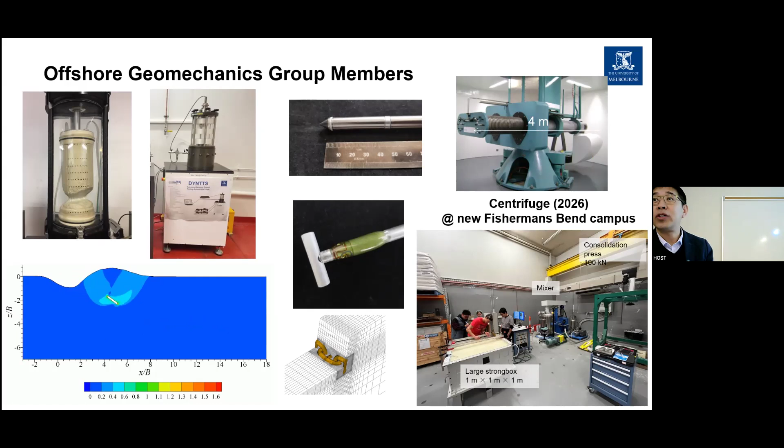In addition, we're developing a large deformation numerical modeling technique. In the coming years - not next year, maybe another 3 or 4 years later - we're going to build a new centrifuge on the new campus in Melbourne.

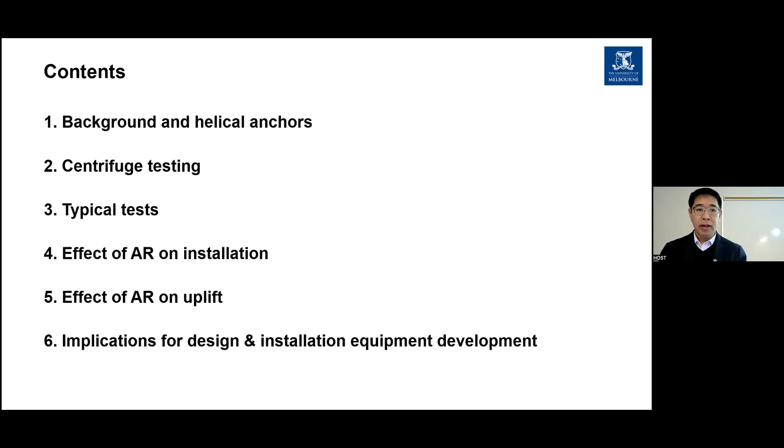Today I'm going to talk about helical anchor. This topic is close to Professor Deng's work. We're going to give a background introduction and also show you some centrifuge testing we have done - we've done a series of tests, but today just a small portion. I'm going to show you several typical tests and talk about the effect of AR on the installation and on the holding capacity. The last bit is the implication for design and for installation development.

The background: the offshore wind industry is booming, especially in Europe and China now. China is pretty much the biggest market now. So far the total installed offshore wind capacity reached 83.2 gigawatts by last year, and is estimated to be 380 gigawatts by 2030. So it's another big market to develop.

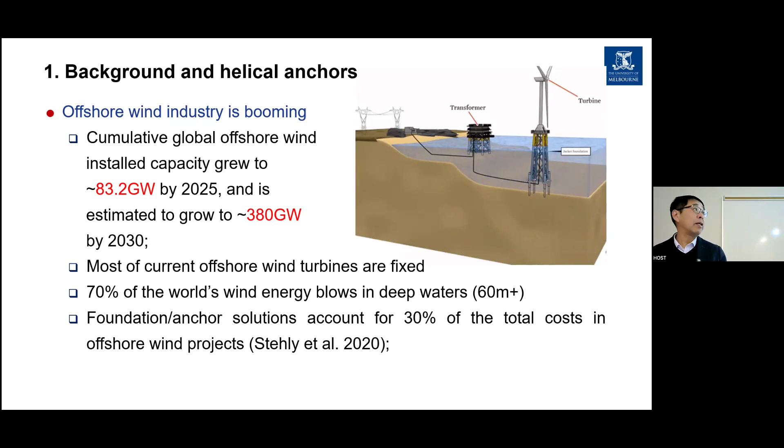Most offshore foundations are fixed foundations - 90% of turbines at this moment are fixed in the seabed, within shallow waters less than 40 meters-ish. However, 70% of offshore wind energy is in deeper water, deeper than 60 meters. So in order to go to deeper water, we need more economic and technically viable solutions, because the foundation costs 30% of the total cost - a big portion. That's why we're developing new foundations.

So the helical anchor came to our vision. We're thinking we're going to use this foundation for offshore wind. So what is a helical pile? Helical pile - and the name - you have a shaft, you have one helix or multiple helix.

This foundation is installed by giving a vertical force we call crowd force - compression - and also we give a torque. So basically you screw into the soil, right? It's sometimes called screw anchor, screw pile.

You have large axial capacity because you have a plate here, helix here, right? And the helix here, this distance we call pitch. That's a distance, right? The opening.

The reason we want to use this foundation is because it is quite easy installation. You just twist in, right? Twist in. For monopile, other foundation offshore, we use a huge hammer. We drop the pile down into the seabed. You make a big noise. That is the damage to the ocean mammals. In some areas, it is banned. You can't use it anymore. And also, we need heavy vessels, very expensive hammer to do that. But this one can be quicker, can be economic.

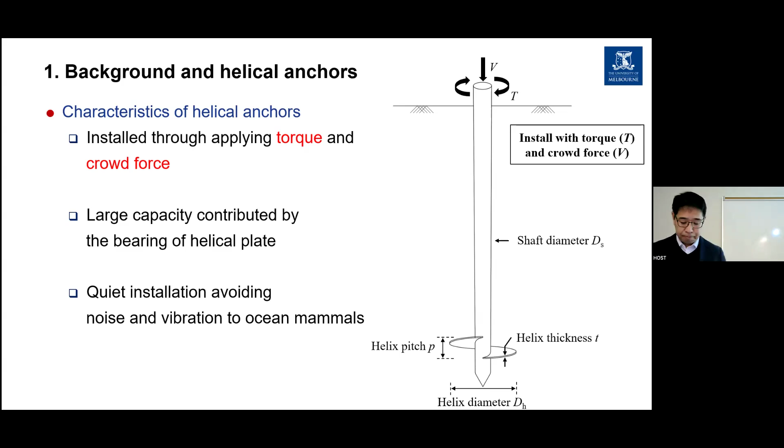This is the idea for helical pile. Helical pile is nothing new. It has been widely used onshore. Professor Deng is an expert on this perspective.

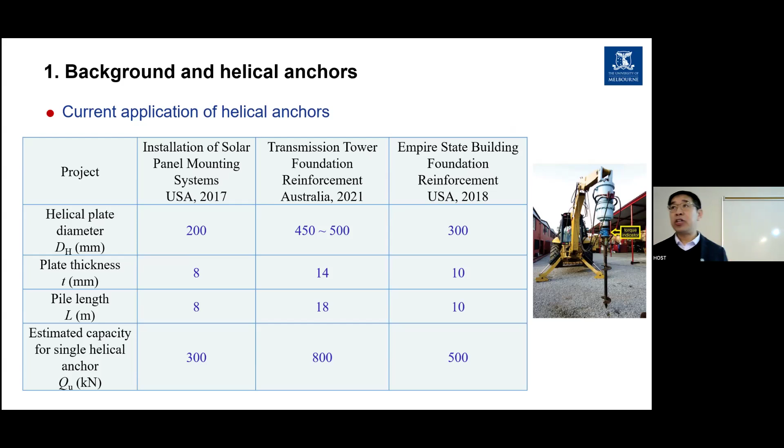So if you look at this table, the onshore helical anchor is relatively small. The diameter of your helical plate is up to 0.5 meter, right? That size. The pile length is 10-ish meters, and the capacity is 300 kilonewtons. But if you go offshore, you need to upscale the foundation much bigger, right? So the challenge is, what is the mechanism and how can we install these huge helical anchors for offshore wind? So this is our challenge.

So I'm going to introduce some of our work, my student's work on the helical anchor testing in centrifuge. We did a lot of tests, but today I'll just concentrate on what we call AR, advancement ratio.

It's defined as the penetration per revolution. You twist your anchor one revolution, one round, you have a distance, right? This distance is, let's say, divided by your pitch. The pitch is this distance. So AR equal to 1, this is traditional, we call perfect installation or pitch match installation.

People thought if your AR equal to 1, you twist one revolution, you have one pitch penetration, right? So in this case, your helix goes the same track. People think this has minimal disturbance to the soil. So this is the traditional thought.

So we did a series of tests. We look at the AR effect. If AR is greater than 1, you have more penetration. If AR is infinite, it becomes pure penetration like a pile without rotation. If AR is smaller than 1, you have a lot of twist. AR equal to 0 means pure rotation without penetration, right? So this is the idea.

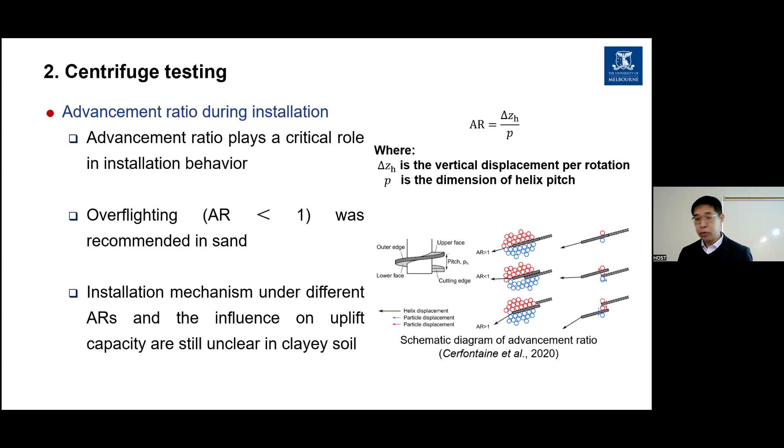And then we did a series of tests because some tests, especially from Dundee's group, they did a lot of tests in sand, and they recommend overflighting, AR smaller than 1. They believe AR smaller than 1, you need less crowd force, and you have a greater capacity. However, in clay, this may not be true. We did tests in clay.

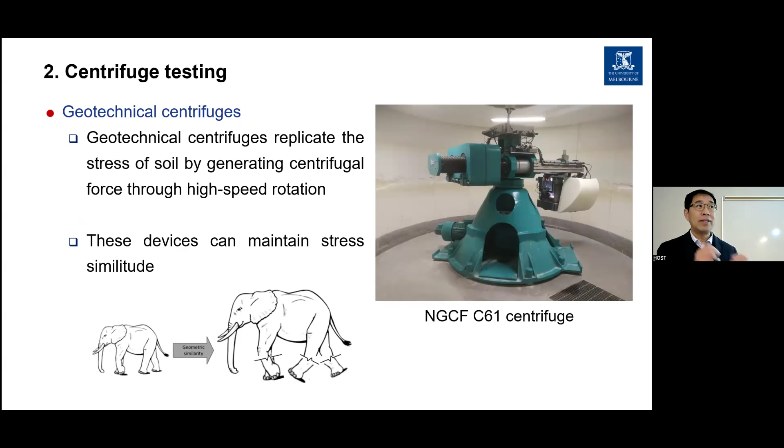And the idea of centrifuge, I think everybody has a geotech background, so I don't need to introduce too much. The idea is soil is a very special material on Earth, right? So you can only add your centrifugal force, so you can increase the stress level. Thus, you can use a small model to represent the bigger one.

So the soil is in a pasty slurry, and then we mixed it for a full day and vacuumed the air out, no air in the pasty slurry. We pour it in this strong box, and then we start to spin this box. When you spin the box it becomes like this, right? The centrifugal force. We spin this at 80 G, 80 times the Earth's gravity.

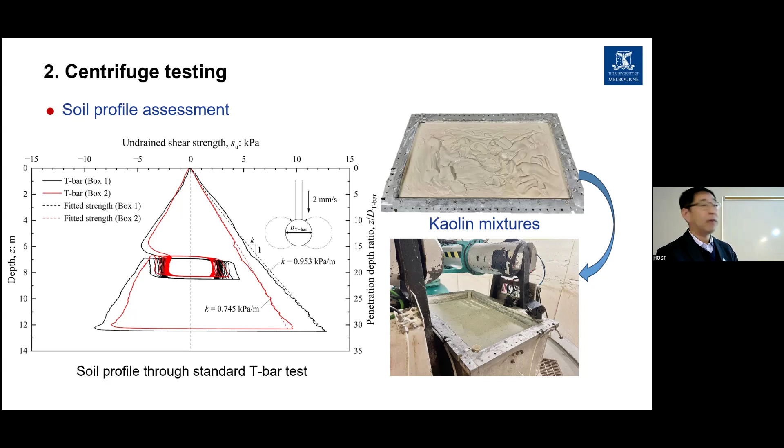In this test, we spin for more than 10 days for this slurry to become solid, to consolidate the soil sample. Eventually, with the T-bar, we penetrate into here. We look at undrained shear strength, the SU. You can see it increasing from the surface. This is normally consolidated clay, right? The increasing with depth. We penetrate, at some step we uplift the T-bar, and then we penetrate again in cycles. From here, we can tell the softening of the soil sample.

And this is the setup. This is the strong box. We have a 2D actuator, traditional 2D actuator, you can go vertical, you can go horizontal, go here. However, for this helical pile, we need another degree of freedom, which is rotation. So we built a rotation actuator, this one. We bound this to the 2D actuator, so we can control the 3-degree of freedom. You can twist and also penetrate.

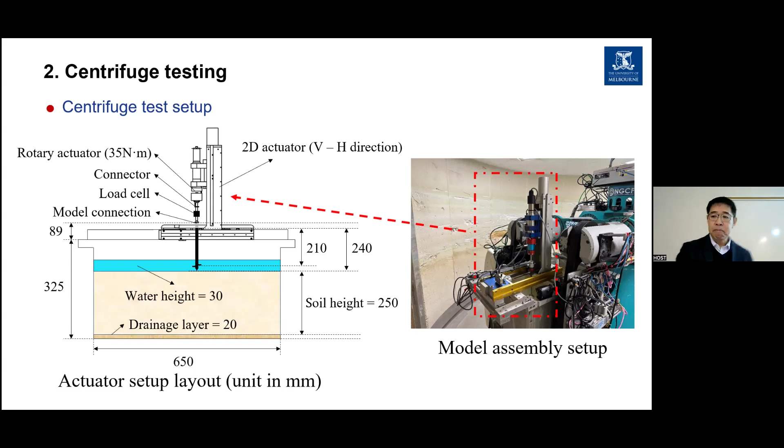So this is the setup. This is our rotation actuator. This is the load cell - you can measure the torque and the vertical force. This is the model, 80 times smaller than the real one.

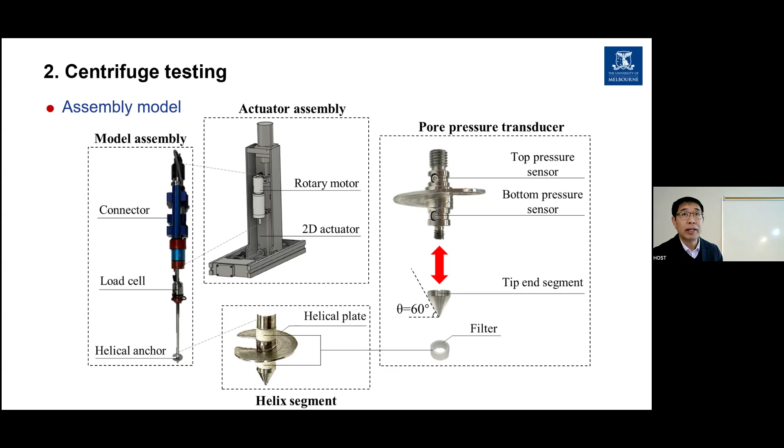You can see this is the helix. On top of the helix here, we put a pore pressure transducer, another one below the pore pressure transducer here, and here. We use a filter stone to cover this so you can protect it. You can measure the pore pressure during installation and uplift.

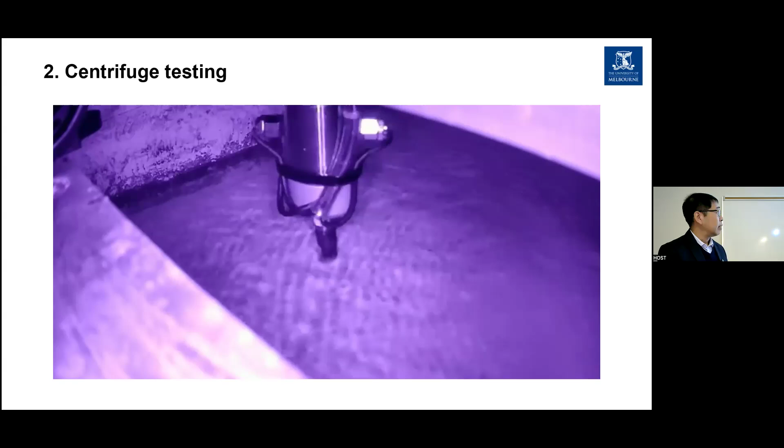So this is the test procedure. You can see this at 80 G spinning very fast. The camera sits in the box. You can see we twist into the soil at a specified AR, and then with this actuator, until we reach that point, we do the uplift.

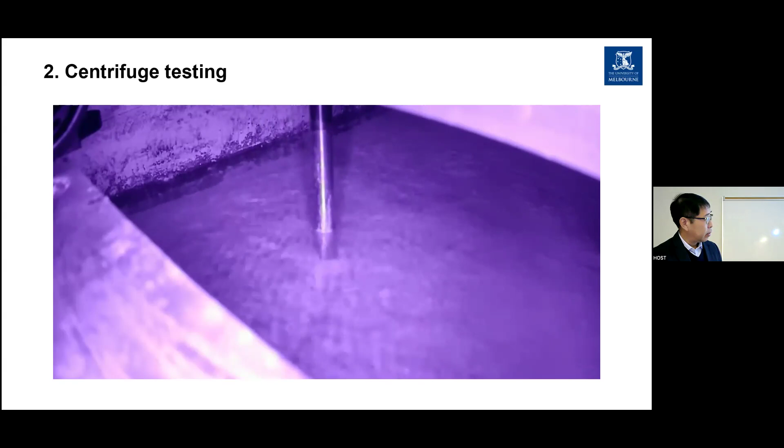During the uplift, it's locked, so no rotation anymore. You can see that when the anchor is out of the soil, there's some soil attached to the plate that comes out from the seabed surface. So this is a test procedure.

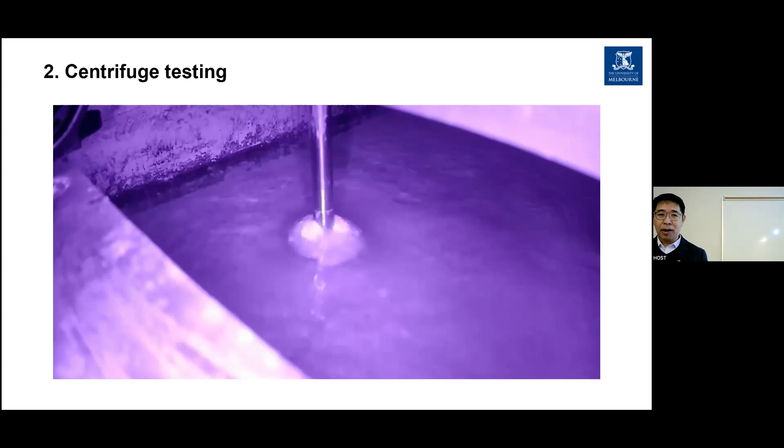We did both immediate uplift after installation, and the other one we hold, for prototype it's 10 years - in centrifuge, several days - hold that to allow the pore pressure to dissipate. We did both. Okay, I'm going to show you a typical test result.

We change the AR all the way around from 3, 1.5, 1, 0.9, 0.75, all the way to 0.1 - a whole range of AR. I'll show you one test, the AR equal to 1, the perfect installation. People thought perfect installation. Okay, so this figure is the crowd force.

The crowd force - we normalize, this is very much the background of Western Australian style. We like to normalize, make it a dimensionless factor. The crowd force divided by the projected area of your helix, divided by the soil strength, then becomes a dimensionless force or factor. This is the vertical penetration.

So from here, we start installation. At the beginning, zero, because the tip - we measure from here. The tip in the soil, the crowd force is very small, until the plate part of the soil starts to increase quickly, nearly linearly increasing the crowd force, until your specified 4.5 times your helix diameter.

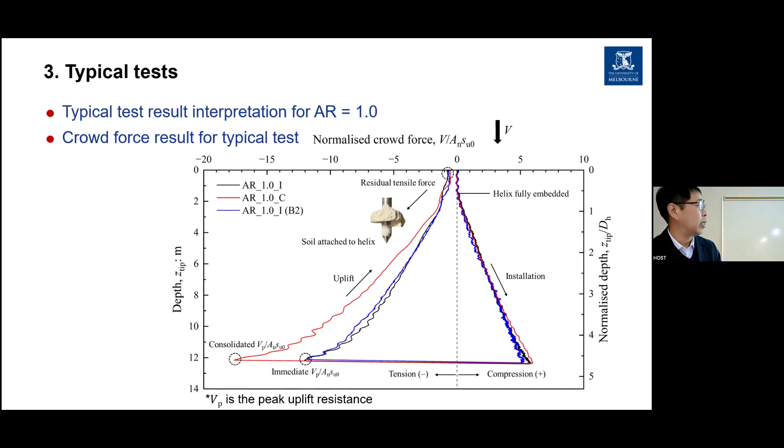And this is easy to understand. After consolidation, you have a much greater resistance, right? This point we call VP, which is your holding capacity of the foundation.

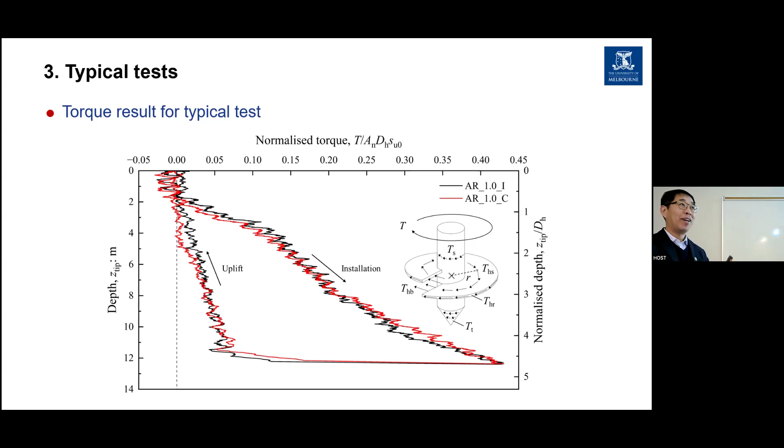When you do the uplift, we lock the rotation, so the torque didn't reduce to 0 - it has a residual value. The reason is when you lift up, the soil tries to push the helix, right? They try to unscrew it because you screw in, then lift up, so it tries to unscrew, which means you have to apply a force to lock that. That's the reason why it's not 0. So this is the torque.

Pore pressure - this is something very interesting, we didn't expect this. We have a top sensor and a bottom sensor for the pore pressure. When we talk about the pore pressure, actually it's excess pore pressure - meaning the total pore pressure minus your static pore pressure. Initially you have a static pore pressure increasing with depth, right, but here we only talk about excess pore pressure.

Installation, we look at the bottom pore pressure first - so the thick lines are the bottom one. This one, the black one, is the immediate uplift. The red one is the consolidated uplift. During installation, pore pressure increases, a positive value, which means as we install it, the soil here is in compression, right? So that is positive. When you do uplift, it becomes negative.

Negative pore pressure means suction - the soil is in tension, becomes suction. And the consolidated one has a greater suction. It's easy to understand: after consolidation, soil becomes stronger, thus you have a greater suction.

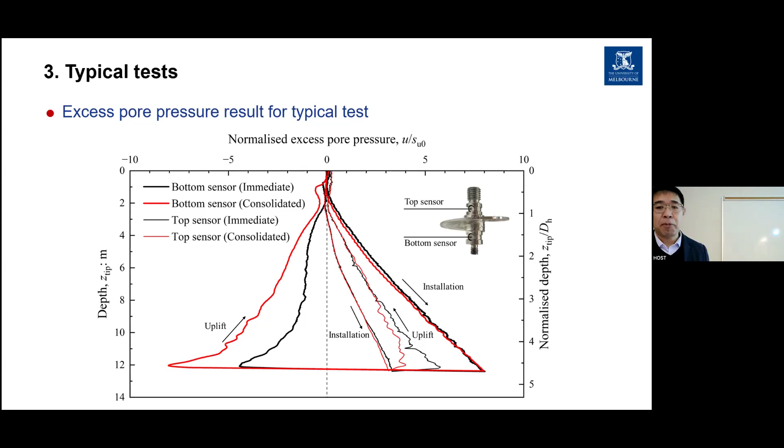The top sensor is interesting. At the beginning, when we install, we thought the top sensor would be negative because when you install it, you try to separate and you have suction. But actually it's not. Installation is still positive, which means the soil stays on the plate, it follows the plate and didn't show a trend to separate. When you do uplift, the soil squeezes onto the plate, so you have a greater positive pore pressure. That's a very interesting observation.

Okay, I'm going to show you the effect of AR on the crowd force. We did a whole bunch of AR tests, from 3, 1.5, 1, 0.9, 0.75, 0.5, reducing. You can see at high AR, which is penetration dominant installation, you need great crowd force, you need to press it. When the AR reduces, the crowd force reduces. When AR equals 0.9, further reducing to 0.75, the crowd force becomes a negative value, which means you don't need to press it anymore. You need to hold it in order to meet your specified AR.

We have this experience, right? When you install a screw with a screwdriver into the wall, at the beginning you press it, but at some stage you only give a torque and the screw goes into the wall. The reason is here: you don't need to press it anymore, the torque will drive it into the soil. With the AR further reduced, this tension comes back. The reason is at very small AR, with lateral rotation, the soil disturbs and softens.

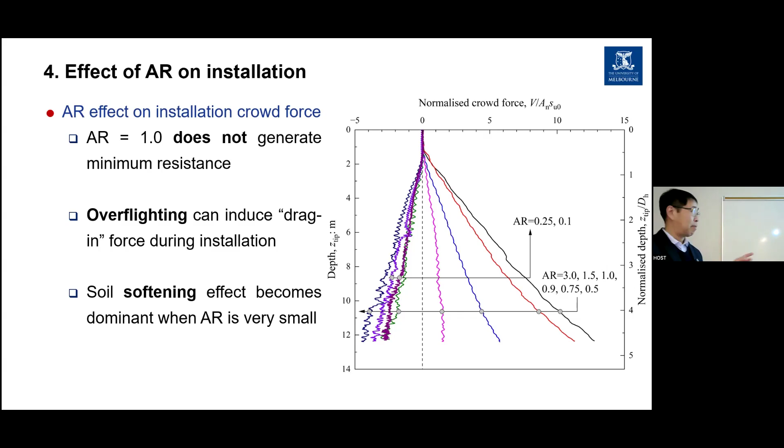This comes back, that's the reason. And if you look at the torque, at a high AR of 3, you don't need much torque because you have a very large crowd force. With AR reducing, you need to increase your torque - at 0.5 you need the largest torque. Then further reducing, Tmax reduces again due to softening. So this is interesting, there's no free lunch - you either do the work for penetration or you do the work for rotation. This gives some implication. I'll talk later about how to design your installation equipment.

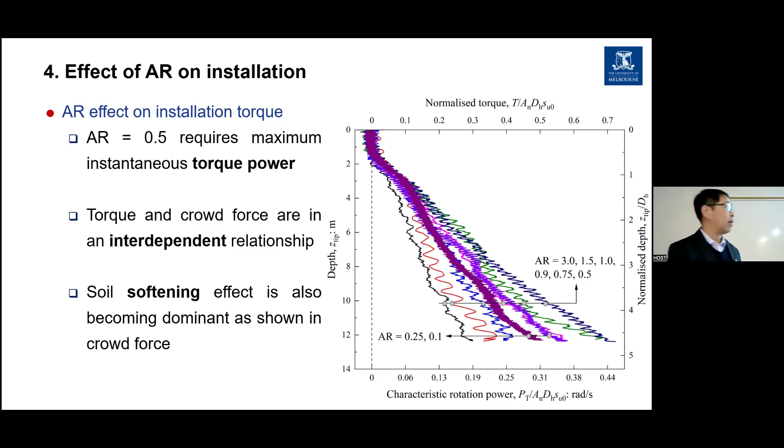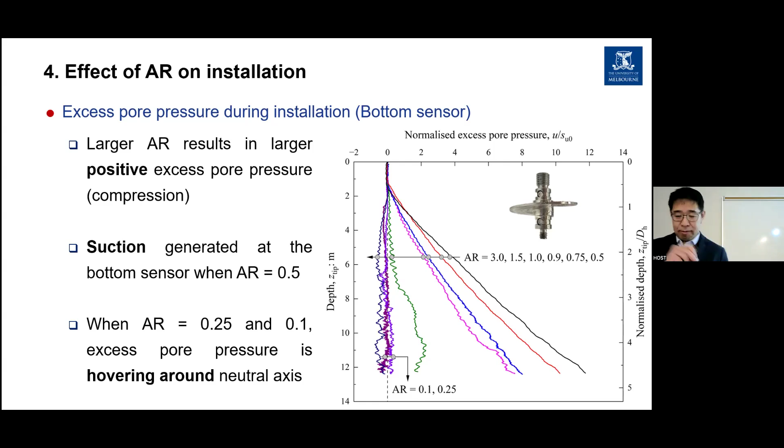Okay, let's look at the AR effect on the pore pressure. Again, this is the bottom sensor first. The bottom sensor pore pressure with AR reducing - at AR equal to 3, you have a great positive pore pressure because of more compression. With AR reducing, it becomes nearly zero or a little bit of suction, because small AR means you don't penetrate much, you stay there, and the soil tries to separate. That's why you generate some sort of suction or zero pore pressure.

The top sensor here, this is interesting. When we do the installation, at great AR you don't have much pore pressure. However, when AR reduces, you have an increasing pore pressure. The reason is when AR is small, you don't go much, and the soil has more tendency to press your sensor. We'll come back again because of the softening effect.

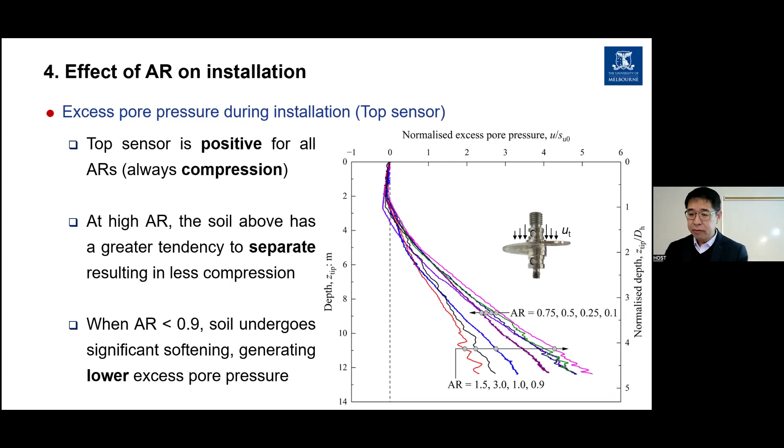Okay, so if we look at the capacity, after capacity - if you remember, we install and then uplift, this peak point we call the holding capacity. The VP is your peak resistance. We take this VP as your capacity, divide by the area and soil strength, and call this the capacity factor. Again, a dimensionless factor. We plot this one versus the AR.

You can see here, this is the immediate uplift. With AR increasing, this increases, peaking at 0.9. Further increase, it decreases again. This tells us 0.9 has the minimal disturbance. So people thought 1 would be minimal disturbance, but actually it's not, it's 0.9 in this case. The reason is if you have a perfect helix - meaning the helix has no thickness and is perfectly smooth - in that case 1 would be the perfect installation. But the actual helix is not, it always has roughness and thickness, so it causes disturbance to the soil. Thus, in this case, 0.9 is the optimal capacity.

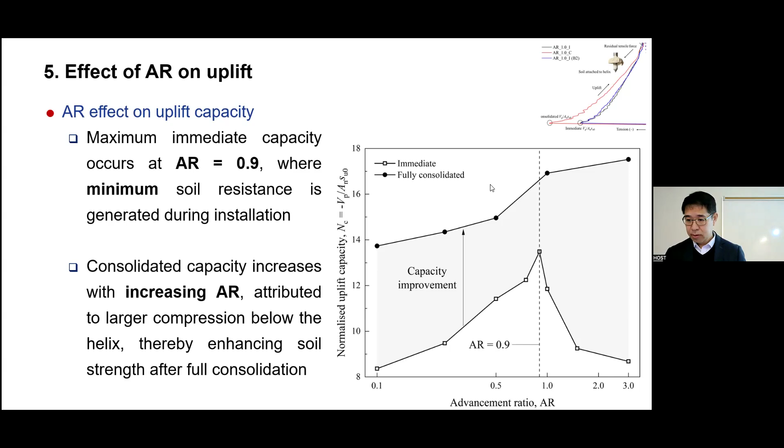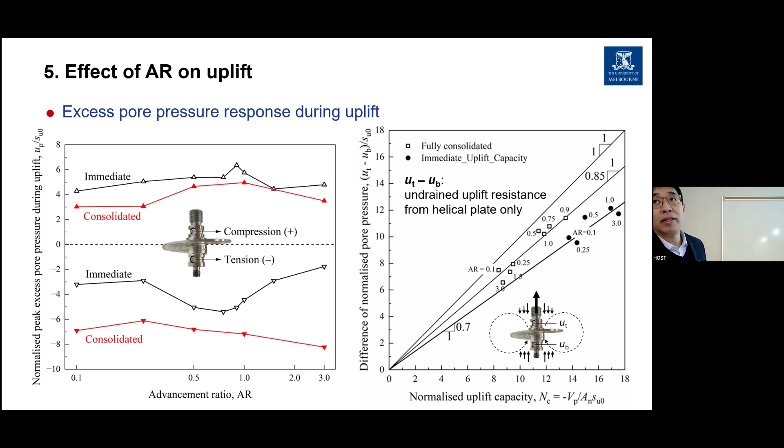For consolidated uplift, the plate contributed 70%, and the shaft contributed 30%.

And then we look into the torque factor we call KT or KT star. KT star is the empirical parameter people use to estimate your uplift capacity from your installation torque. Because we have the full data here, we can back calculate KT star by using the capacity divided by your torque.

So we have this line, the immediate uplift, the consolidated uplift, these are the factors. At small AR, the ratio, this is low, you need big torque, your capacity is small. But at greater AR, you don't need much torque, your capacity is great. So that's the reason, look at this.

We compare with other empirical parameters in the literature.

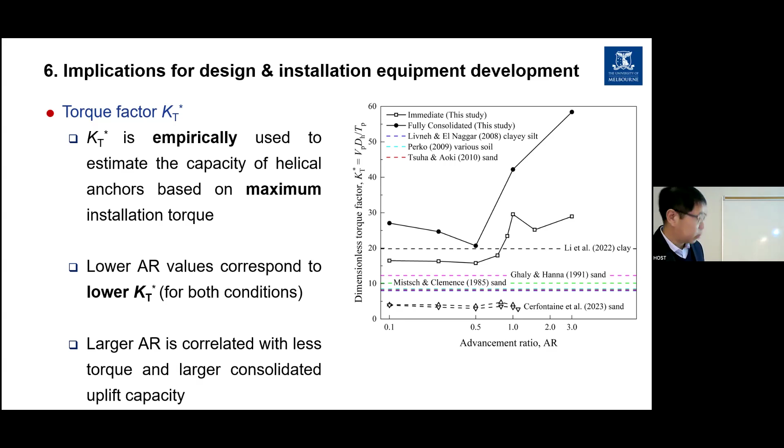I think I'll go to probably the last bit, which is on the installation equipment. This is the challenge for us, as Professor Deng also talked about. For onshore, you have an excavator or bobcat, you just make the hydraulic motor give a torque to install.

But for offshore, we need a much bigger plant or installation equipment. How do we do that? Especially with a barge on the ship, you have a great torque, how do you resist your ship movement? So we try to improve our confidence on this.

So we draw the installation into this figure, the crowd force, weight, and the torque. For great AR, you need a great crowd force but less torque. With the AR reducing, you need a great torque, you don't need much crowd force at all, or even tension.

So again, you can either do penetration-dominated installation by using a great vertical force, or alternatively, you can do a torque-dominant installation by applying a big torque where you don't need much crowd force. You can do both.

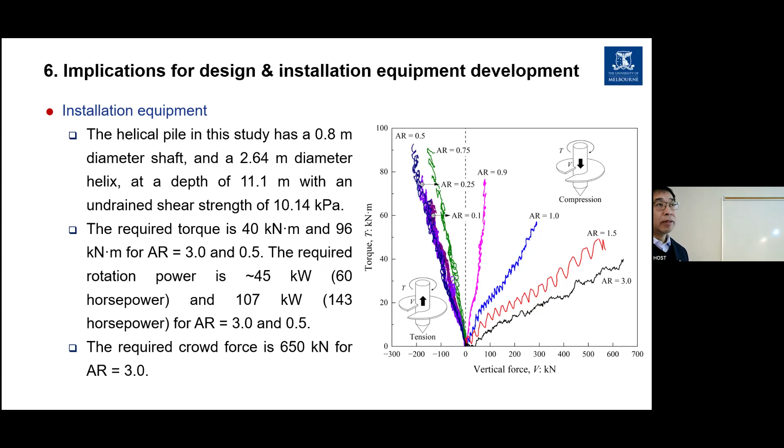Okay, I think I'll just stop here.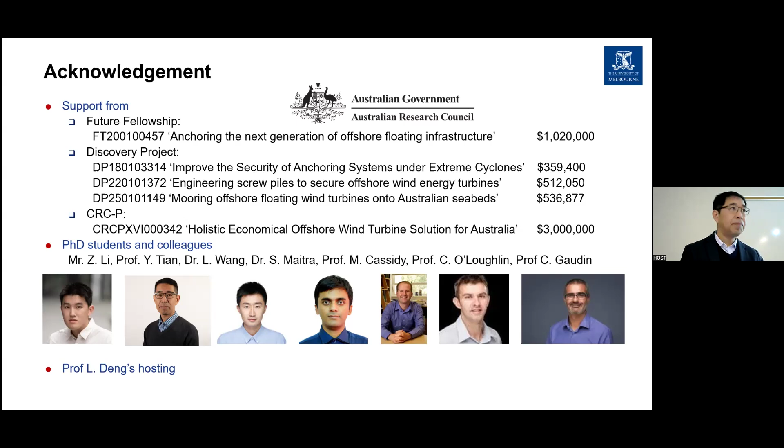Thank you, very good question. In this test, we only concentrate on normally consolidated soil. For over-consolidated soil, we didn't do much work yet. My understanding is the behavior should be similar as long as it's undrained. The trend should be similar, but the force can be different. Over-consolidated soil can be much stronger, much harder to install. This is probably your first question, but behavior can still be undrained.

The second question is about earthquakes. We didn't consider earthquakes. Actually, in my research, I never did any work related to earthquakes because in Australia it's not a big problem. Not sure if earthquakes are important in Canada or not, but there are some earthquake zones, right? So I don't know. For some soil it can be critical because it can cause liquefaction, can cause problems. But for us, for this clay soil, I don't know. For silty soil it can be critical because liquefaction can happen, but for this one, it's hard to say.